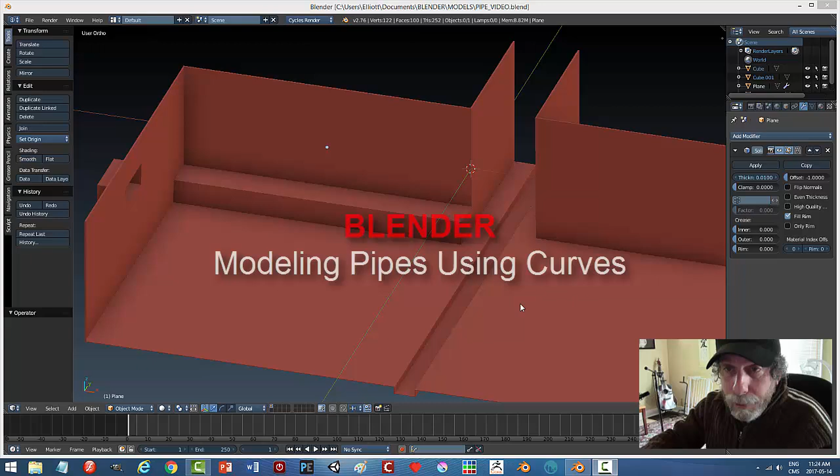This isn't my tip, it's something I've seen on YouTube, and there are probably a number of people doing stuff like this. But once in a while I like to make my own video so I can remember myself instead of going back to their page to check it out. So I can't take credit for this, but anyways, it's about making pipes.

Easy way to make pipes. Let's say I want to make a pipe that goes down through this little gully thing here, up over here, and up and out through that hole. With the old way of using a cylinder and maybe a torus for the connecting piece of the elbow, it can be a real hassle.

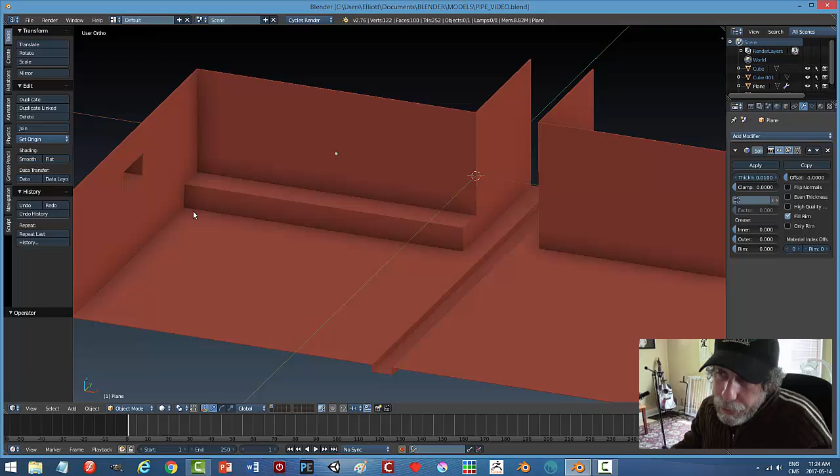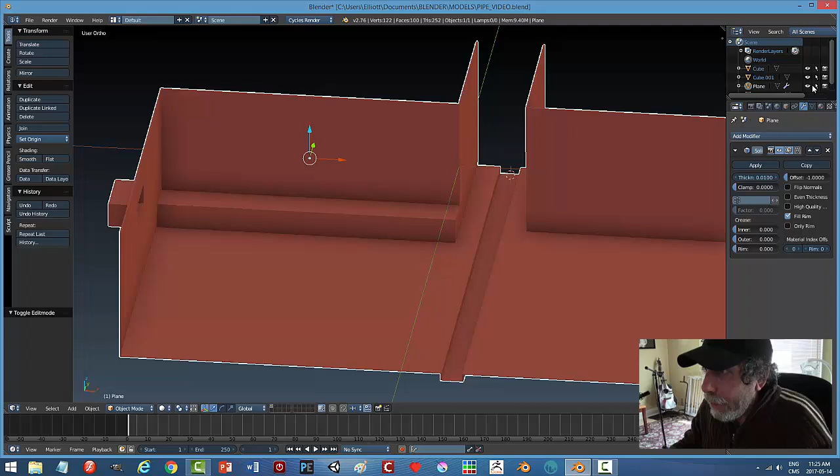So an easy way to do it is to do something like this. I'm going to come in here, and let's say I want it to start right there. So I'd select that edge, Shift S, cursor selected, so I can bring in my object right over there. What I'm going to bring in is actually going to make this thing unselectable, so I can't move this. I could rotate around though.

I'm going to bring in a plane, go to edit mode, vertex, and Alt-M to collapse those vertices. So I've got just one vertex right here. I'll bring it up just a little bit, and that's what I'm going to use.

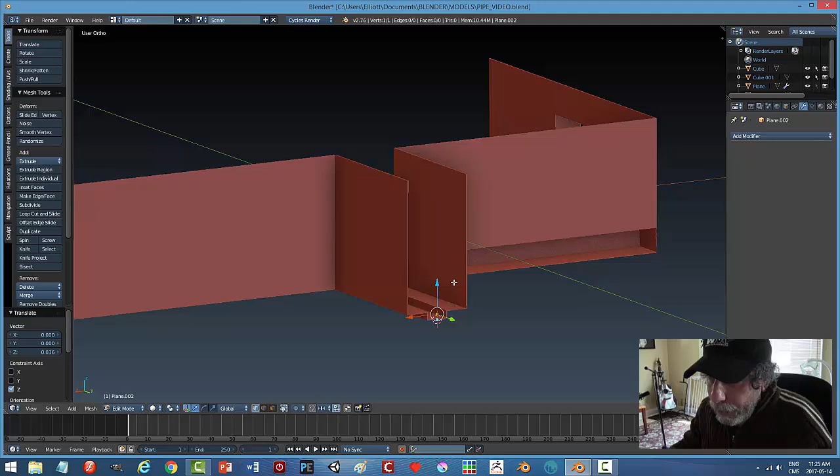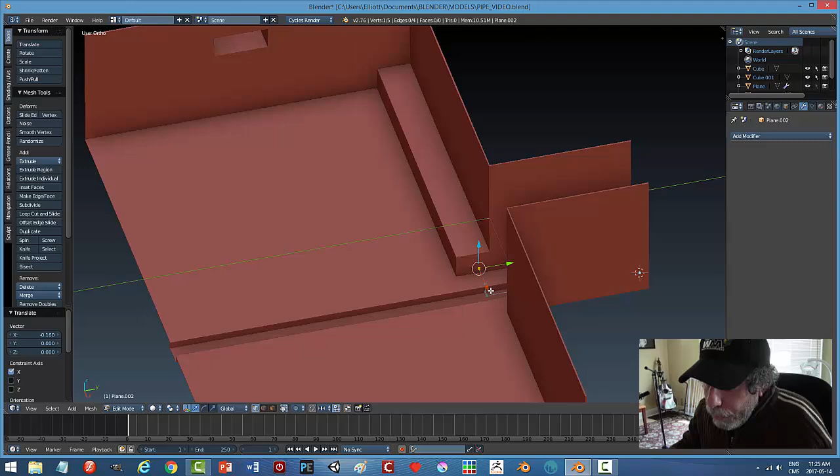All right, so I'm going to go E, and then move it down here, and then E again, and go over to here. E, and I'm going to come over to here, and now let's pull back a little bit, E, and come up in the Z.

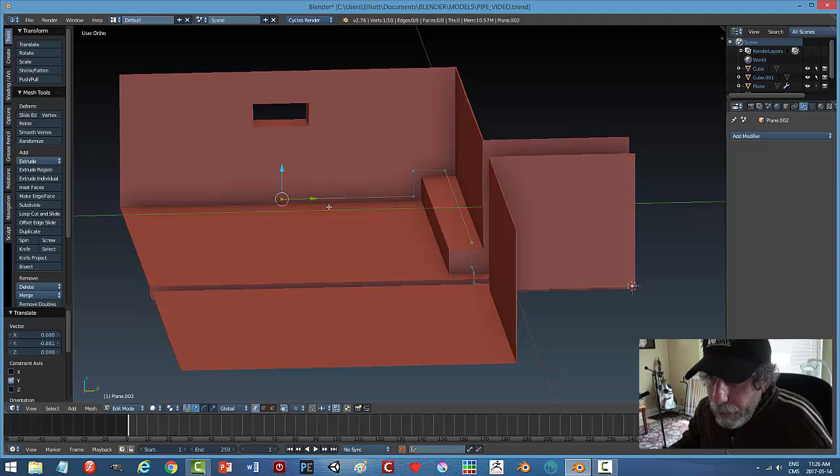I'm going to go down here, so I want my pipe to sort of be on top of this thing, and then maybe I'll make it come down here and up there. I'll come over to here, come down close to the ground, then go across, then come up. This is very quick to here, and then we'll go out the window. Okay, so that's what I have.

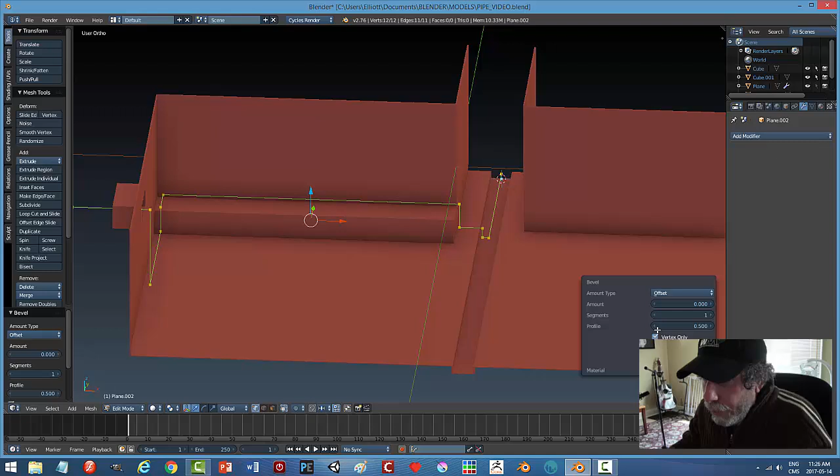We'll select everything, and here's what you do: go Control B as if you're going to bevel this, Control B, and you'll see the dotted line and the cross. Just click to accept it, then press F6 to bring up the options, or look at them over in the side panel. I'm going to choose vertex only, and maybe 4 or 5 segments.

I'll go with 5. As I pull this, you'll start to see them showing up there. Now, this is the area of difficulty here.

I'm going to leave it at that, but since they're so close to crossing over, I'm going to get rid of a few points down here. I'll get rid of this, get rid of this, get rid of this, and just join these up again. It might not be super smooth. Oh, I got an issue here. I'm going to get rid of this one, and maybe that one, and just join these.

Okay, so I've got all my points. I could actually delete some of these if I really wanted to. Maybe we'll go with that and see how it looks.

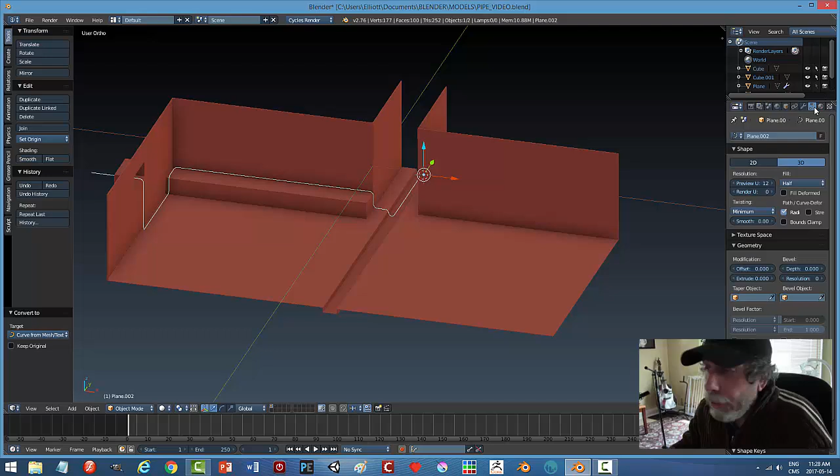So I've got that now, and then what I do is go back into object mode. Looks nice and smooth, and I go Alt C to convert this to a curve. Now I've got the curve panel here. Just click on the curve panel, choose full, and a depth maybe 0.03.

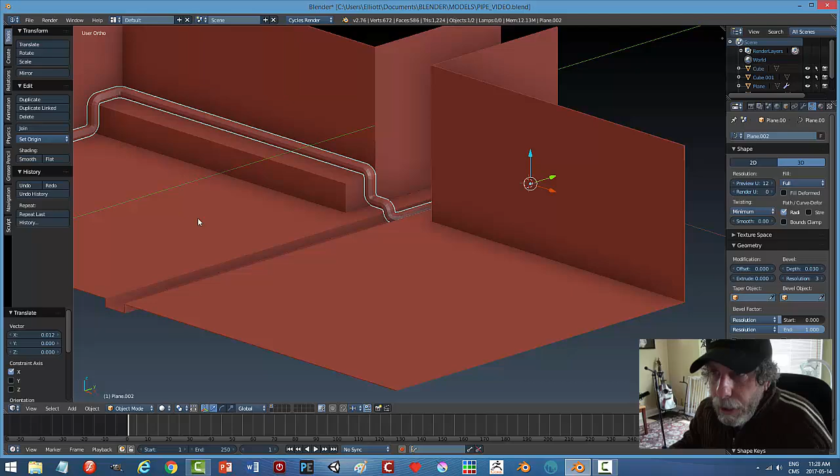Let's try that, it might be too much, but we'll see. Bring up the resolution, maybe 3 or so. Have a look at this. I might have to adjust the positioning a little bit, make sure I'm not going through any solid objects. Did I go into the wall?

That looks actually fine there. So let's say I'm okay with that thickness and everything. I'm going to go Alt C, and convert it to a mesh, and then add subdivision surface. I'll go with 2, and smoothing, and there you go. There's my pipe, easily made with all kinds of weird angles.

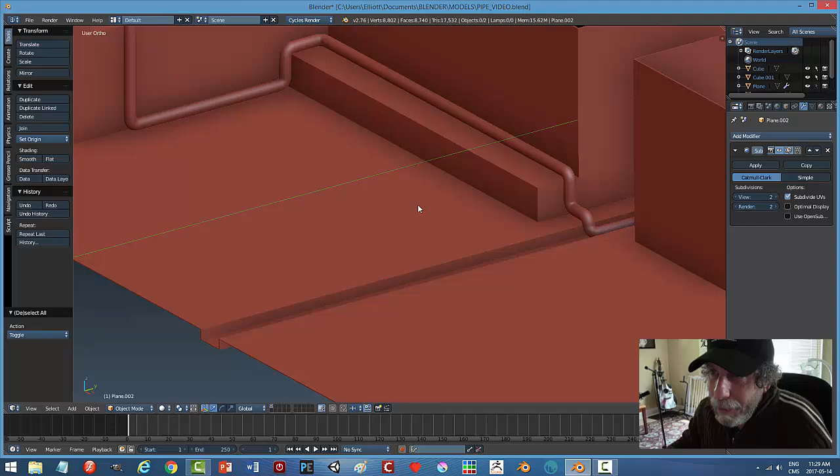That's a little bit thick, you know, you might not like that. The other thing you can do then is go into it, and face select mode is easiest. Wherever these elbows are, I can select these areas.

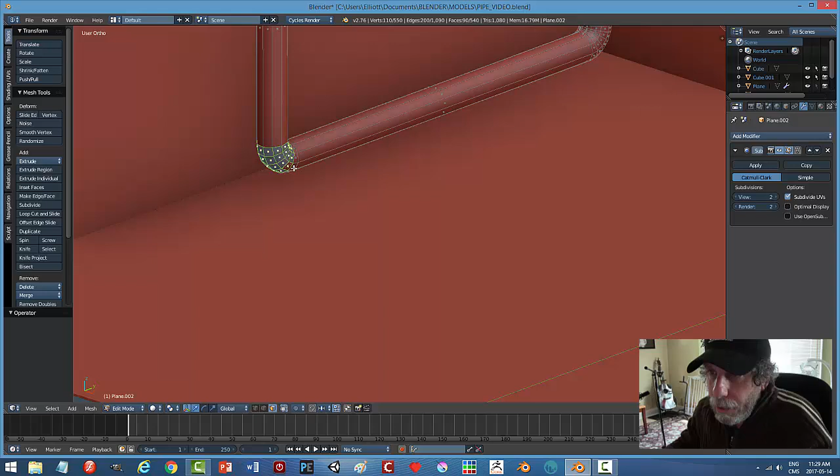I'll select some of them. They don't all have to be done at the same time. I'll do a few of them at the same time.

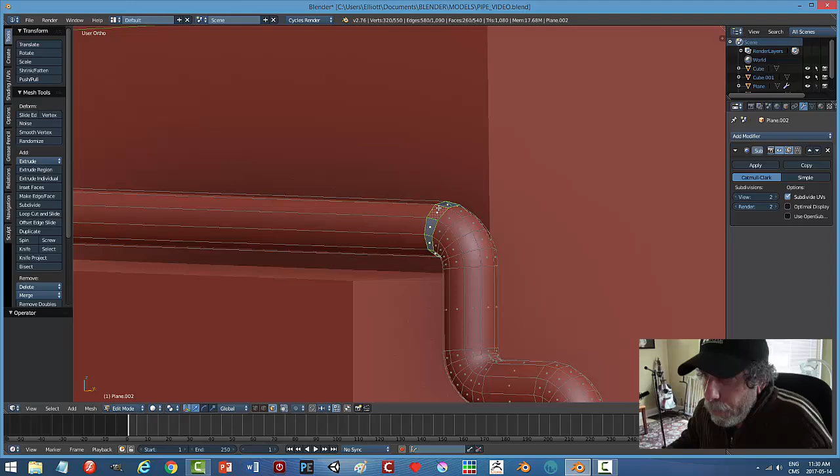Maybe I'll do all of them. This one's a little bit weird, so I'll leave that off for a moment and go E to extrude. And then because they're going in all different directions, what am I extruding, the Y, X, or Z? Instead, go Alt S, and that's going to scale them. It says I've extruded, and now I'm going to scale them along their individual normals, whatever they might be, all over the place.

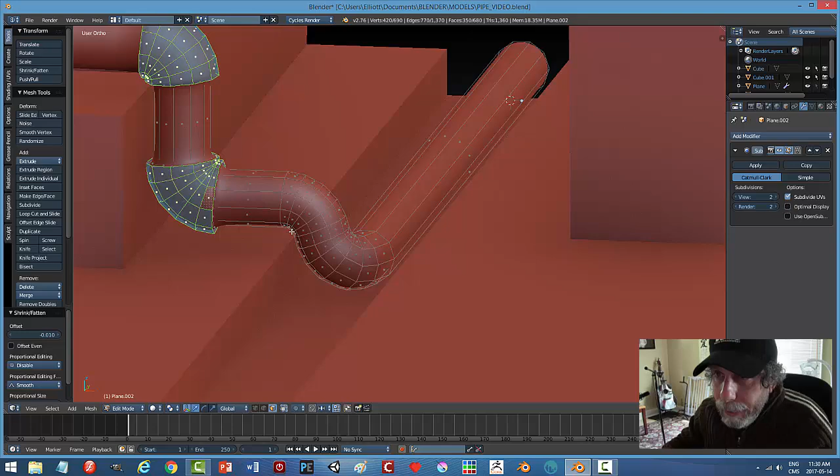So I'm going to try 0.02. No, maybe I still do it, or did I lose that? I lost it. Okay, so I'm going to go Alt S, 0.01. I'm just going to accept that. Sometimes when those points get too close, things will cross over and it gets all weird.

This looks okay, you just have to be careful about that. So I've got that, I could leave it. I'll show you what that looks like. So it's made the little elbows. Again, some of them look kind of pinched. I think that looks kind of cute, it's a little bit more organic looking.

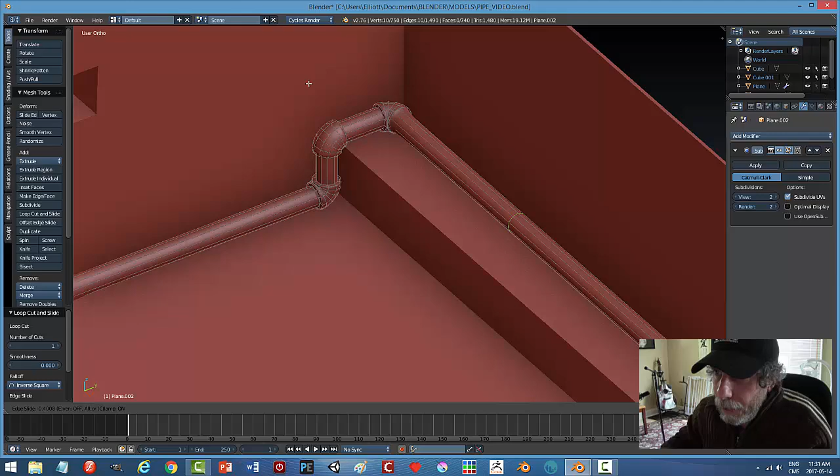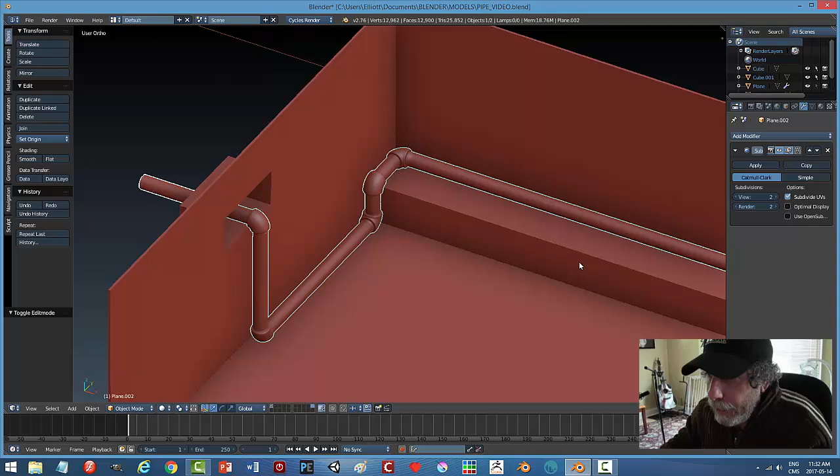You may or may not like that, but then you can just come in and add some edge loops to tighten things up. So I'm just going to go around and add edge loops at pretty much all of these. Or maybe I'll just do this section of it to make it a little bit quicker. Just to have a look at what that's doing to it. It's starting to tighten it up compared to that look over there.

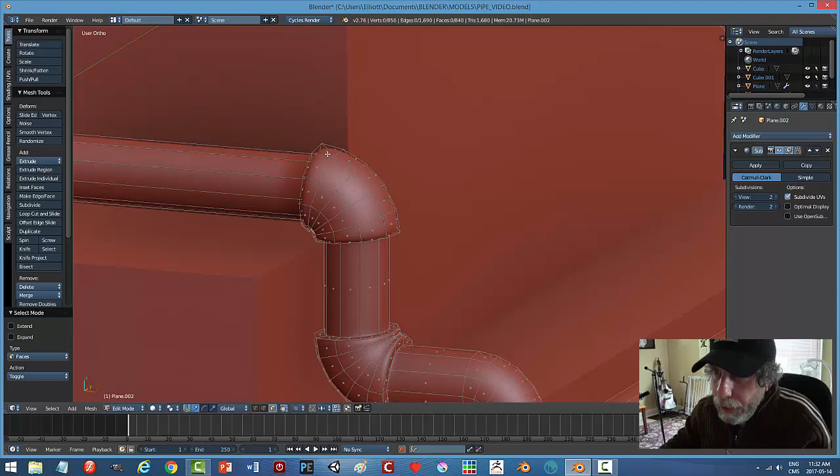Okay, so you can do that, and you can also, of course, because it's sub D, come in and put one there and here, right? Now it's tight, but they'll fit, and they'll adjust to the curvature. Nope, not that thing.

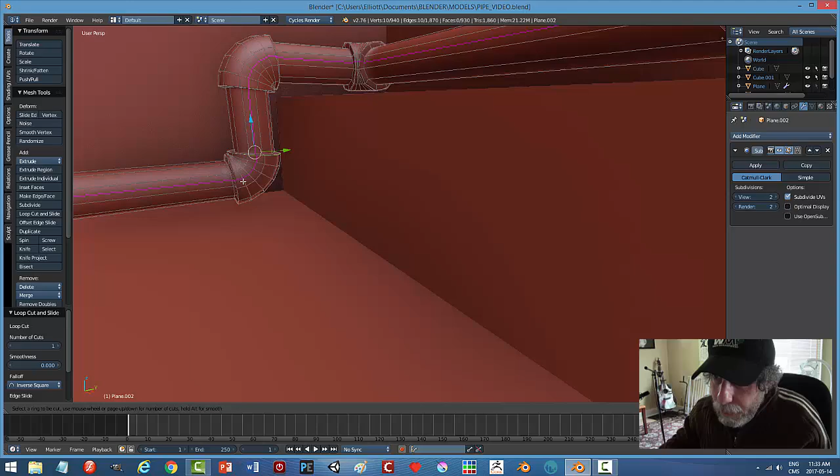There and there. Oh, that's not what I want. On here. Here. Get this guy on there. If you were using a cylinder and pulling around toruses and trying to line them up, it would probably look more mechanical, which is a great look, and I've done that before, but this is a quicker way to do it, and I'll show you another thing in just a minute.

Let's see if I can fix this one up a bit. No, let's just maybe put another one in and see if I can clean that up. And one more, and then we'll have a look at what it's looking like now. Okay, so that's what it looks like now.

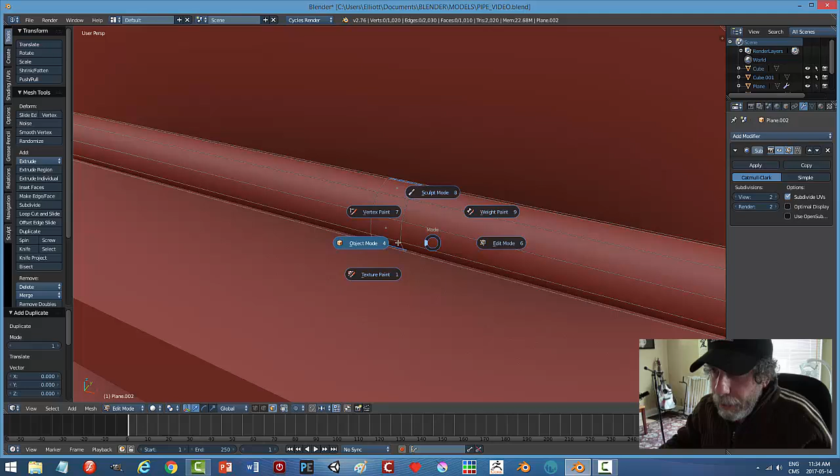You could still do something like go in here and, let's say, to two of these, scale in the X to make them closer. Something like that, let's say. Zoom in, face select mode, grab those faces, Shift D, P to separate selection. So grab that, and then go E, scale, Shift X.

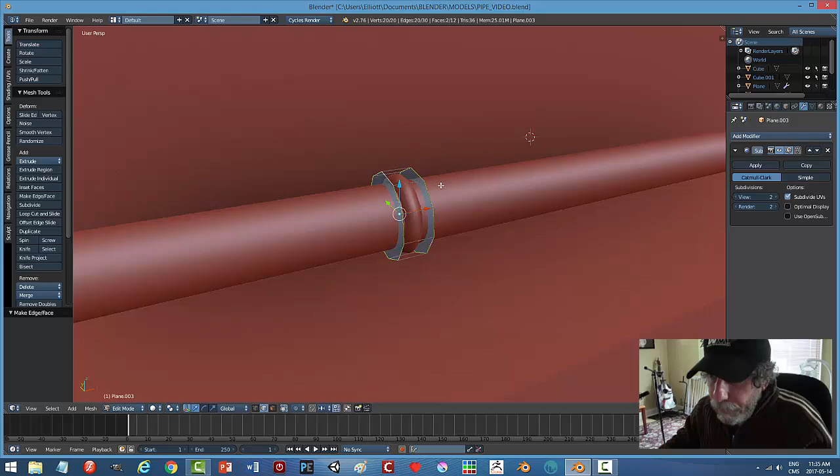Always not grabbing it. Scale, Shift X. No, then grab it. Oh, do that first. Scale, Shift X. To do that, I'm building that ring, and then I'll do one at a time. Maybe put a face on there, and this one, put a face on there, and then that's okay. Put an edge loop there, and an edge loop there.

And I could now just pull this down, and I'll just scale Shift X.

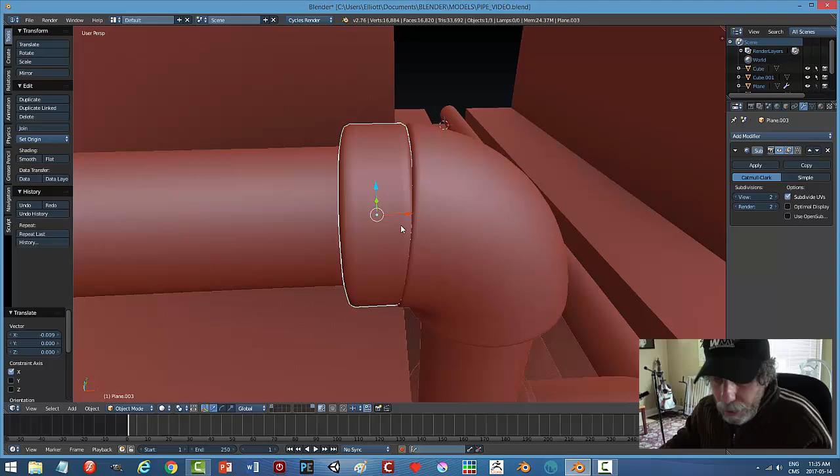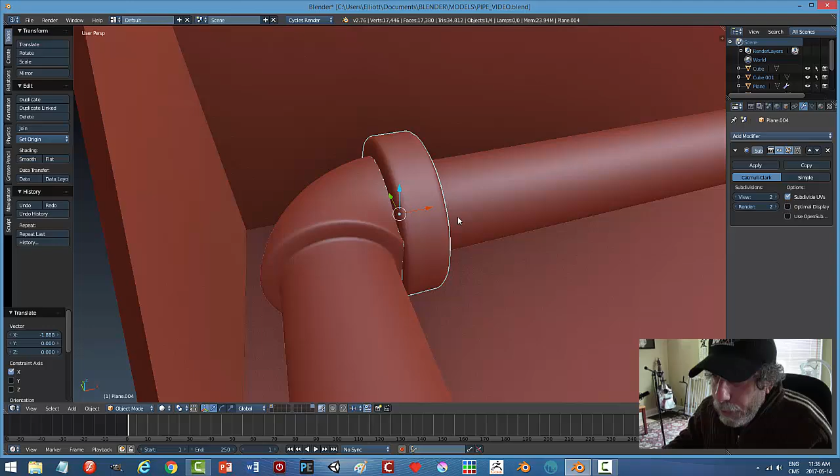If you wanted that end piece, you'd have to go through this anyhow with the piece of the torus that you connect to the cylinder, and you'd have to be orienting it. Some of them, of course, are in the right orientations right away, like all these sort of horizontal ones, you could do kind of quickly. You just get the right size of this one.

Okay, rotate Z 90. This, you'd have to be doing this. Anyhow, you'd probably be doing it in wireframe and trying to line it up nicely, which is something that I should be doing, but I'll do that.

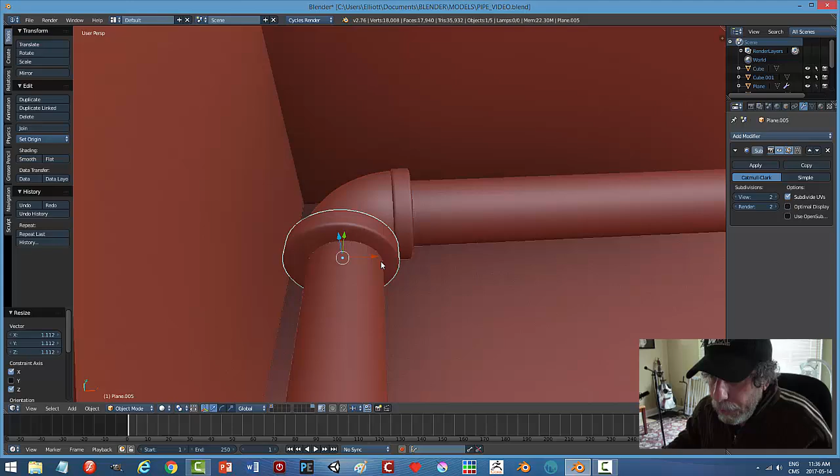Okay, scale Shift Y now. Like I say, you could go through and do all those caps, but it's a lot quicker to do pipes this way, and you get a relatively nice looking pipe, and you can cover all kinds of weird angles.

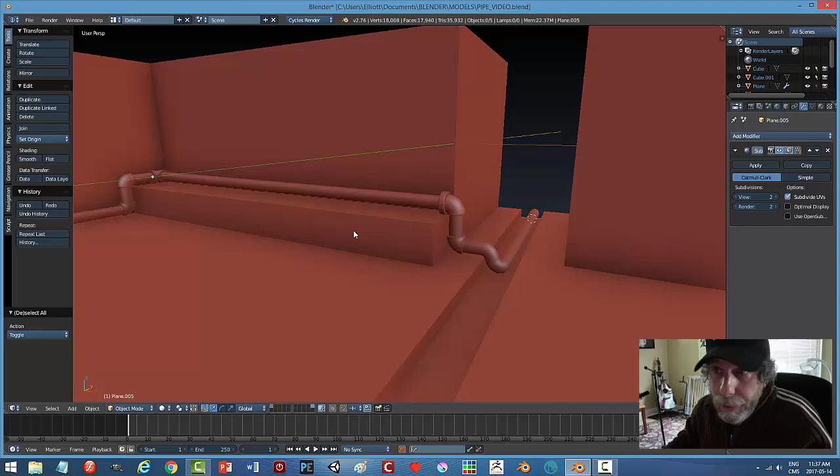So once again, I just wanted to share that. It's not my tip at all, but this way I can remember that next time I need to do that, I'll probably do it this way. All right.